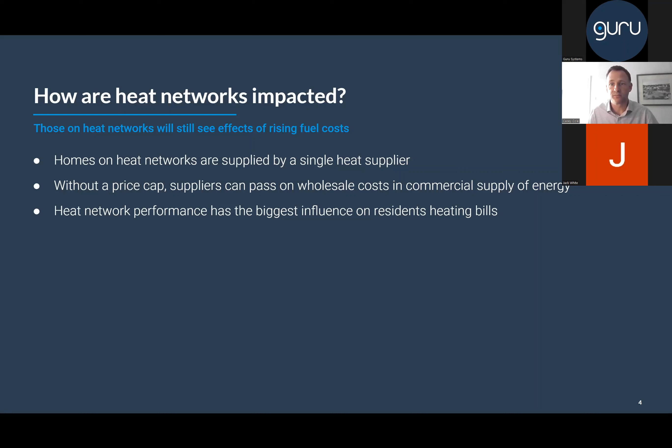If we were all in the room together, which we're not, at this point I would pause and say, is that clear? Has anybody got any questions so far? If you have got any questions, please put them into the chat. And Charlotte, if there's something contextual that we need to pause and talk about while we're going, just stop me.

Okay, super. So let's talk a bit more about inefficiency as a multiplier of the underlying gas cost. And although we said gas here, I just want to be really clear. If it's an electricity supply into a large scale heat pump, the principle is exactly the same. So the way to think about this is that the useful heat demand in a dwelling is what it is. The amount of heat that a dwelling requires to satisfy space heating and domestic hot water requirements, let's imagine that they're a fixed number.

So the key question is, how much heat do you have to put in at the energy center in order to get that amount of useful heat out? The extra energy that you have to put in at the energy center is all about the losses on that network. So it's how much heat is that heat network losing in transit between the energy center and the resident. That's the extra energy that has to be put in.

So just at an intuitive level, it's really easy to imagine that if you have higher losses, then to get the same amount of useful energy out at the dwelling level, you've got to put more heat energy in at the plant room, and therefore you've got to burn more gas or consume more electricity, right? That's the intuitive picture.

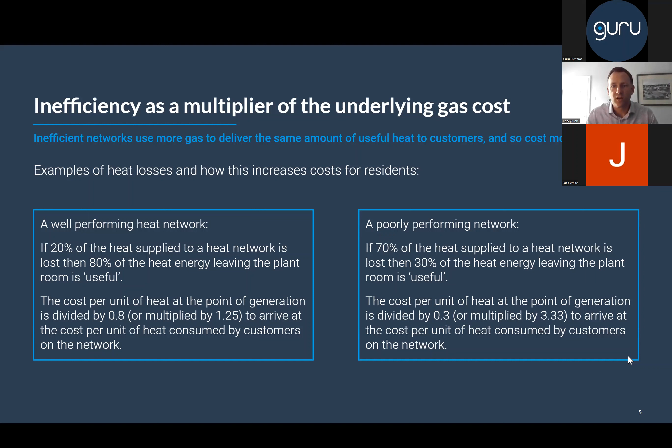And you can quickly see that on a heat network then, the rise in the gas price is only the first part of the story, or the rise in electricity, only the first part of the story, because all of that then gets amplified up by the performance of the heat network. Okay, so those are the principles. Let's look at it now in a slightly more visual way.

Okay. So this is the same idea. I'm actually going to start on the left-hand side, right? So losses as a percentage of input energy, and then the equivalent heat cost multiplier. So we already covered the case where it was 20% losses, and we saw that it was a multiplier of 1.25. And we've seen the 70% case where 70% of our energy is being lost as heat losses on the network. And that's a multiplier of 3.33.

We filled some values in between here. So 30% losses is 1.43, 40% is 1.67, 50% is now 2, which if you think about it for a minute, makes a lot of sense. 60% is 2.5. Change that into a pound figure, and by making some assumptions about standing charge and input price of fuel, and I appreciate that those details may change depending on your particular heat network, but the shape of this line, the magnitude of this line is what's most important on the right-hand side on this graph.

So what you can see is that as the heat losses increase, they increase reasonably shallowly in terms of cost, and then it really starts to ramp up beyond about 40% heat losses. And you can very quickly go 3x or 4x what you would find on a good performing network.

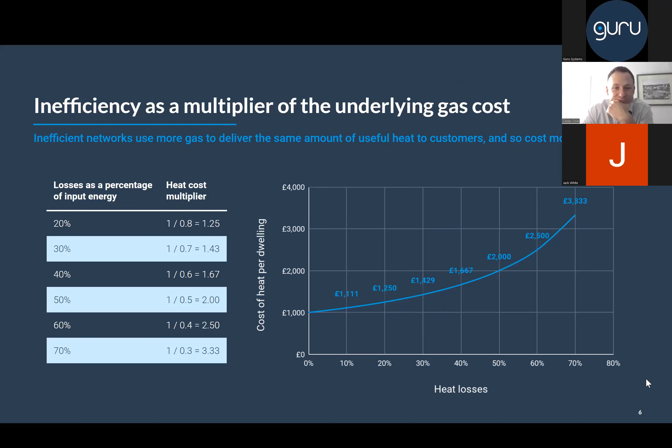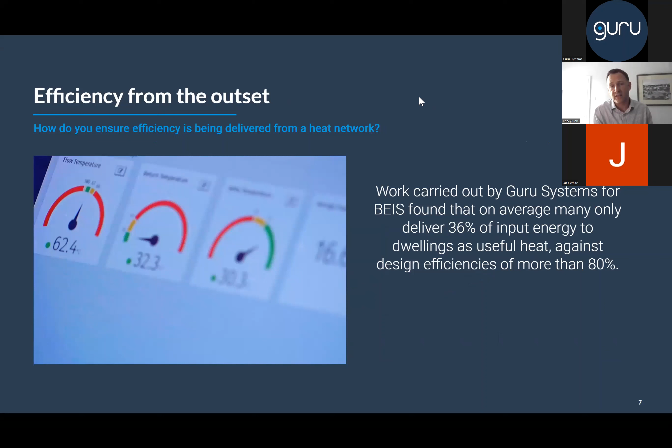Great. Let's go on to the next slide. So we did a piece of work for BEIS, going back some distance. This is back in sort of 2016, 2017 time. And we looked at, I think, about 40 networks. And what we found was that heat networks mostly were not working as well as had been expected. And in many cases, they were only delivering about 36% of input energy as useful heat out.

So, do the maths, that's 64% losses. That was an average of the sites. And there were outliers in both directions. What we tended to find was, one, everybody had much better intentions at design, install, and even into operation, more like design efficiencies of 80% or more. And two,

the networks that performed well were the ones that were monitored. They were the ones that were watched. Somebody was getting some data, checking how the thing was working. If it wasn't working, they were then taking action to put it right. So the important takeaway here is that networks have the potential to have very high losses. And if you go back several years, it didn't matter if they were new or old. This wasn't a function of age of the networks. It was just, were they watched and operated well, or were they not?

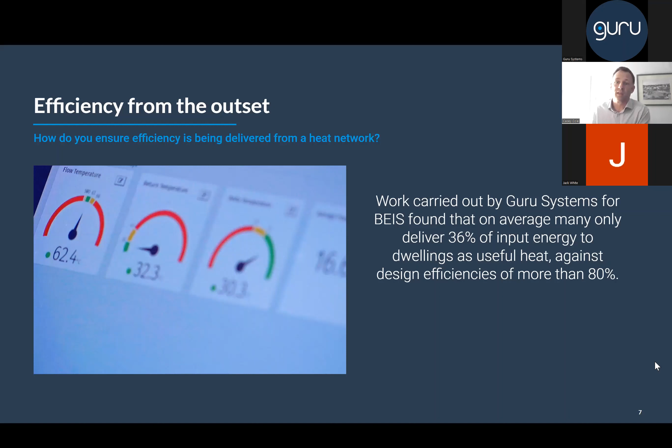Go on to the next one. So what do we want to do here? Well, we want to get the data from heat networks and use them to identify whether or not they're working. The old adage about you can't manage what you don't measure is fundamentally true here. And what we've seen again and again is where it's not measured, you can bet it's not performing well.

So I can't think of any time in the last 10 years when we've got involved in a site where nobody had been watching, and when the data started to flow, everything was fine. That has never been the case.

Data has the potential to show what's going on at the dwelling level, what's going on at bulk metering level, and at the energy center. And it's important to say, where's that data coming from? On a heat network, it's coming from heat meters. There is a requirement to install heat meters on new networks, right? So you've got them at the dwelling level. There's a legal requirement to install them at block level. So those are going in. And you've almost certainly got energy center meters as well.

The usual assumption is that those meters are going to be used to meter and bill people, to take a kilowatt hour read to generate a bill. But what's important to emphasize is that meter has got lots of really valuable performance information in it: flow and return temperatures, flow rates, cumulative volume, cumulative energy, instantaneous load. There's all this precious information in there that the meter knows from moment to moment, not just once a month when you want to generate a bill.

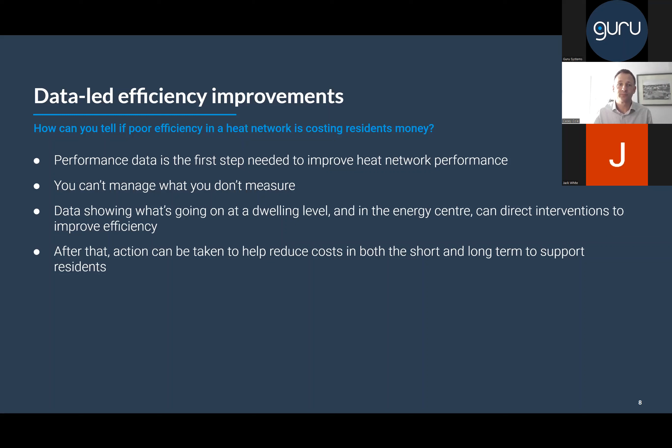I'm going to hand over to Jack for this next part. Thanks, Casey. Yeah, my turn.

So, hello everyone. Casey's kindly taken through all the general thoughts and ideas around network efficiencies, but I'm going to start going into a little bit more detail on what you can do with the information that we can get out of these buildings. I'm going to talk about what a good heat network looks like, what a bad heat network looks like, and then on the poorly performing networks, what kind of problems you can use the performance data to spot and what to do with that information to help keep the resident bills low. And then we'll finish off with a couple of real life case studies to show how poorly performing networks have been turned around using performance data as the starting point.

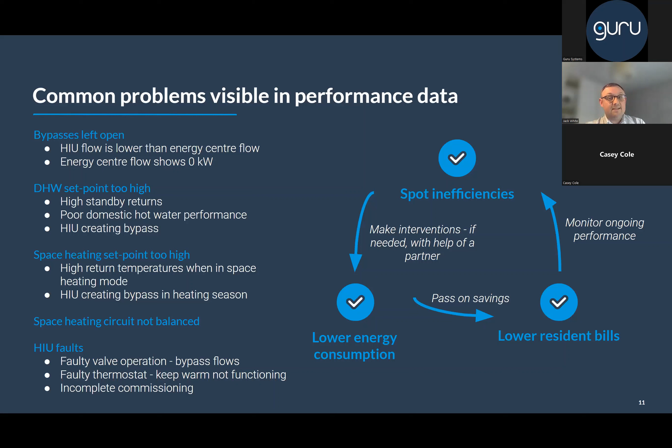Okay, next slide, please. So we've been looking at a bit of detail in the previous slides. We're going to have a look at a couple of case studies now. These are looking at overall schemes. If you know us, you may recognise the first one, as it's a project that we've talked about before, and the second is a site that recently won a CIBSE award for good performance.

So in this case study, as both landlord and energy supplier, Network Homes had previously charged residents a flat rate for the energy it supplied, and it was unable to monitor energy consumption in individual properties across the network. I think some of you on the call probably recognise this. If you've had developments handed over pre-2015, there's a chance that you didn't have meters on it. Pre-2014, 2013, you probably don't have meters in a lot of these developments.

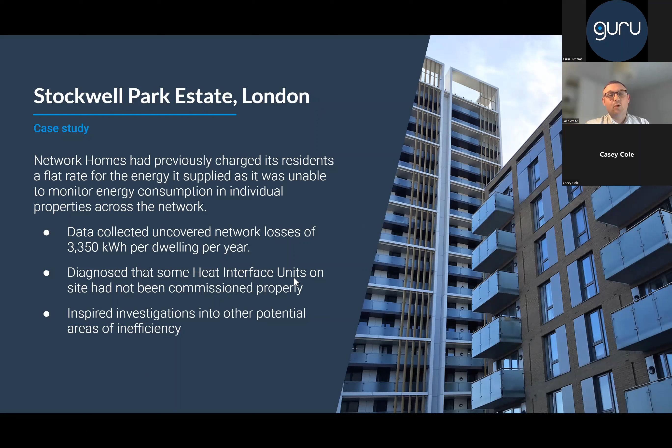So it's very common. In this case, using performance data, Network Homes were able to diagnose that the heat interface units hadn't been commissioned properly and were poorly performing, which was resulting in really high return temperatures. And the data collected also inspired site investigations, which found missing insulation on the pipework. So a small intervention there. The results were actually huge.

A 53% reduction in heat network losses was achieved by starting to monitor this development. And it just goes back to what Casey was saying earlier. You never go into a project that doesn't have decent monitoring on it that is running really well. It was pure data that exposed all of these issues. They knew they had a problem, but it was the data that exposed where and how to fix it.

47% reduction in terminal run temperatures versus ambient for dwellings with interventions. 60% reduction in terminal run losses for dwellings with interventions, which saved more than 1,700 kilowatt hours per annum across the site. A £140 saving per household per year after resident heat consumption reduced by between 20 and 30%.

And obviously it's worth noting that since this project, the cost of heat has more than doubled. So these interventions would be saving nearly £300 per year today.

Okay, next one, please, Charlotte.

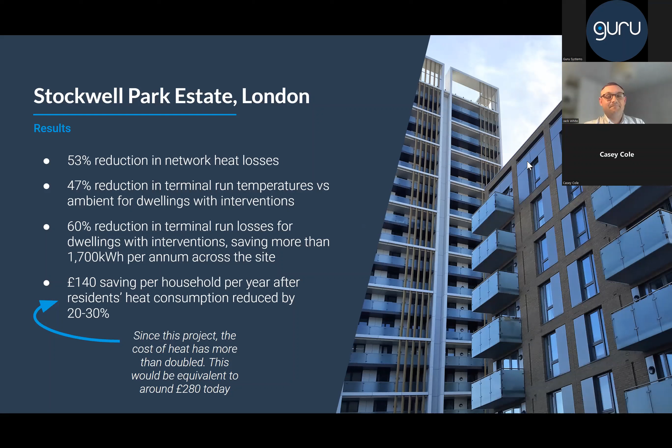This is a more recent project. This is the one that won the Building Performance Award. It's a project we ran in collaboration with Fairheat, so Echo Court. And the project involved data-led acceptance testing, so the new process defined by CP1 2020.

If nobody's heard about this on the call, we've got a load of literature that we can help you with, and we can talk you through what this is. It's great. I won't go into detail here, but it's going to change things for the better.

Guru Hub 2s are installed across this particular development, and performance data was used to ensure that the network was run to design before the residents move in, and that's key. Getting this done before the residents move in means that it can be fixed, because this is usually the problem. Commissioning is put back to 1 or 2 days before practical completion, and then you just can't get back in to fix things.

Fairheat estimated during the review process that they would be able to save each resident around £160 a year, and reduce the scheme's carbon emissions by 72 tonnes per year. And these calculations were actually carried out in 2019, so the savings to the residents are going to be far more, over £300 given today's energy prices.

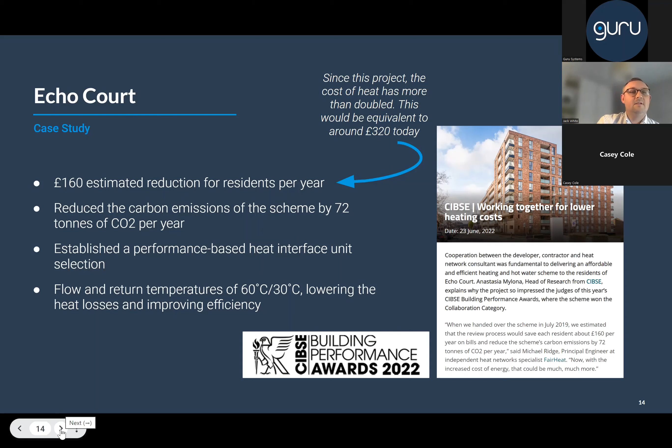Next one, please. So we're just about out of time, but before we move on to the Q&A, I just want to pull out these final points. Again, it's something Casey mentioned earlier, the old adage, you can't manage what you don't measure. Well, there's also a little bit more to it than that: don't do the bare minimum either.

Your metering and billing requirements are 30-minute data coming out of each dwelling, which can tell you a little bit. Just make sure that the systems that you're specifying can get you more high frequency data, and all of the metrics that come out of the meter too. Super important. There's no point scrimping and saving 10, 15, 20 pounds to value engineer that out, when actually you could potentially be saving that weekly by having this performance monitoring that sits on top of the infrastructure that you're putting in anyway.

So this performance data that you get out of site can help reduce costs for residents in both the short and the long term. In the short term, this might be smaller interventions like HIU recommissioning, or smaller capital projects like extra insulation. And in the longer term, there might be more targeted solutions for bigger problems, which will also help to lower costs relating to maintenance and frequent call-outs. But overall, better performing heat networks can save money for residents over time. So if you don't have the skills in-house to stay on top of heat network performance data, find a partner who can help you do it.